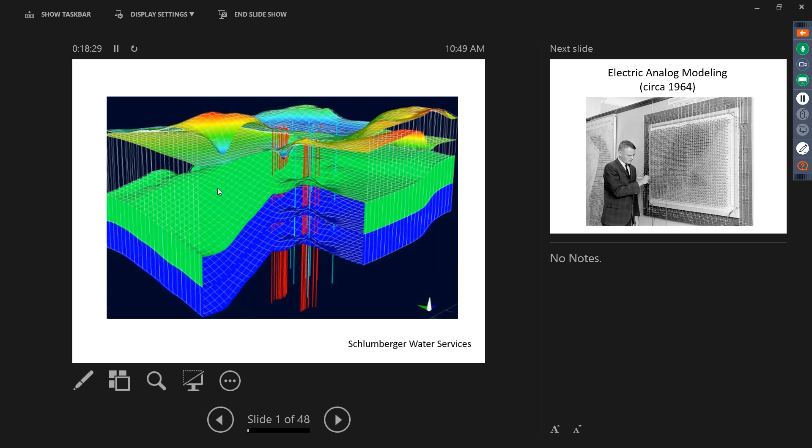So behind us, this is a picture from 1964, and we can play with this later, but this is how the Water Survey started to do modeling—the analog models. So, Darcy's law is very similar to...

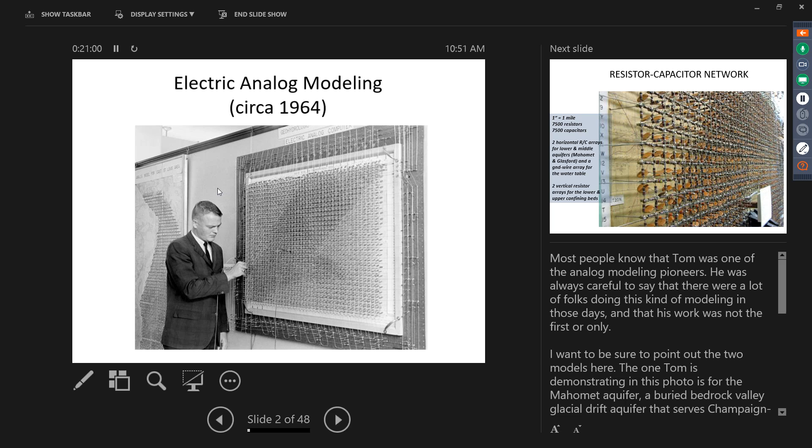If you go to the Illinois room in the other building, you'll see the one for the Mahomet aquifer in Champaign. So this is Farmer City on the topo sheet here, so Champaign is in here.

There's actually a whole series of nested ones. This is actually 2 layers - not 2 layers right here, but in some areas it becomes 2 layers. You can see it gets darker right here. There's another row of resistors below that.

And there's also capacitors. What do capacitors do? They store electricity, so this is how they did storage. This was a transient model. So for a transient model, you need to account for storage, and go from there.

So actually down in the war room, there's a paper sitting out - I think it's sitting out - on how these work, if you're interested.

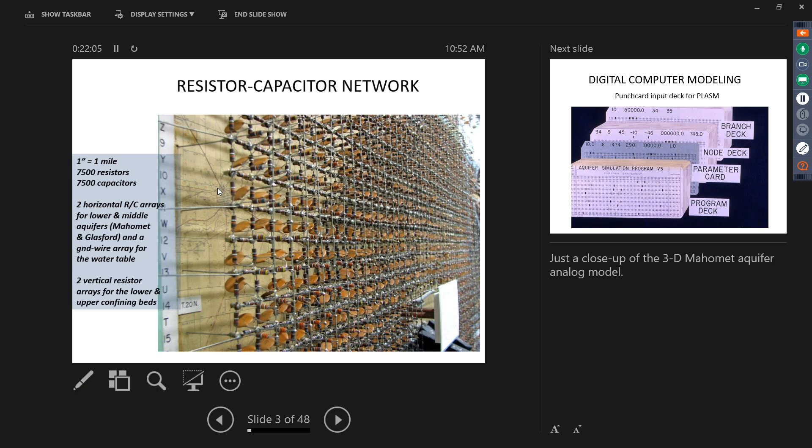We then went to the punch cards. I am not old enough to have ever used punch cards, but just barely missed it. Darn, no.

Bulletin 55 is written by Tom Prickett. He was here for a while, a very famous modeler. And then he kind of stayed around and tutored us a lot after he formed his own consulting firm, because he was doing so much work on the side when he was here. Did that for 20 years and then retired and just did expert witnessing.

But then in his later years - unfortunately he died young - he would come back and would like to come in and shoot the shit and pick apart my models and what I was doing wrong. And most of it actually revolved around storage.

It used punch cards, and there's a small anecdote. Supposedly, according to water survey lore - you know how true that is - no, to our computer guys who were around at the time, this was the first off-site job, at least non-military job, of a computer program.

So Tom was taking these stacks of cards - because each card has a line of code on it - down from the water survey, which is now CAB at the corner of 6th and Springfield, down to DCL, and feeding it through the card reader and running the program. And I thought, oh well, that is not very convenient, to take things down on a dolly, because it was a big thing. It'd take all night to run, but it runs like that now.

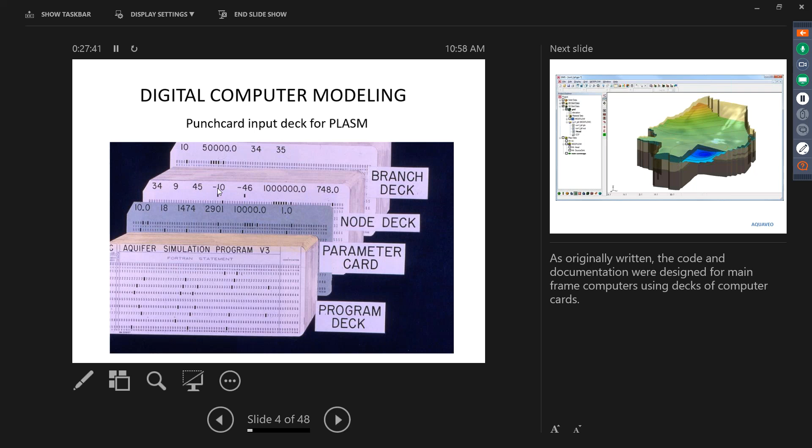Typical USGS. You know how long USGS review takes, right, Dan? Forever, yeah. So we'll talk about that in a minute.

These are just some of the newer packages now. Instead of punch cards, they have what we call pre and post processors or GUI interfaces, to make all the pretty pictures or get the data in. So we use Groundwater Vistas. We used to use Visual MODFLOW, but I think we have to keep our eyes open and change as things change or as they get better or not better.

So we're kind of wedded to Groundwater Vistas right now, but I think that's something we need to be very wary of, because it's a one-man operation, and if he gets run over by a bus, then we're stuck. Or he retires. Or retires, yeah, he's older than I am.

And his brother is, I don't know, some hermit in the mountains of Pennsylvania that actually does the coding. Really? I didn't know that. Yeah, Doug. You never see Doug. It's always Jim. The mythical Doug, yeah.

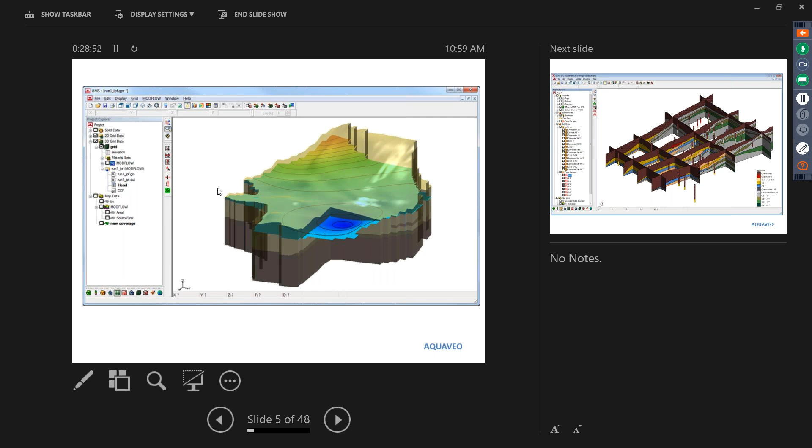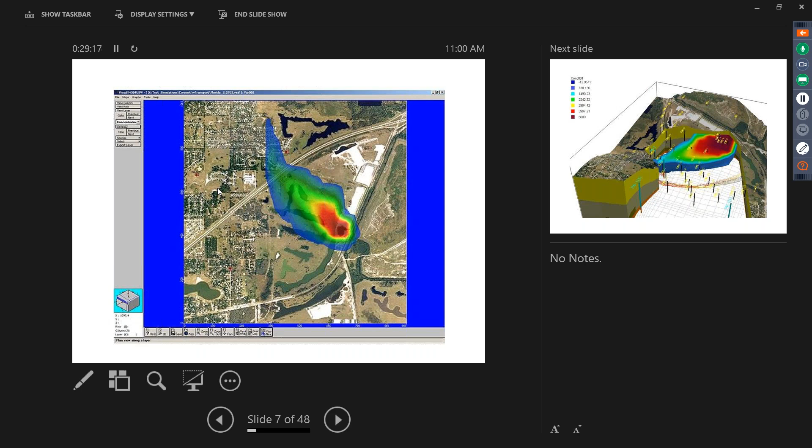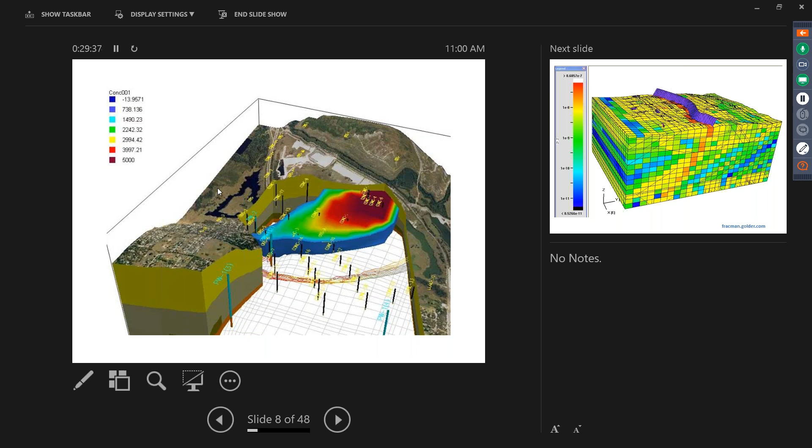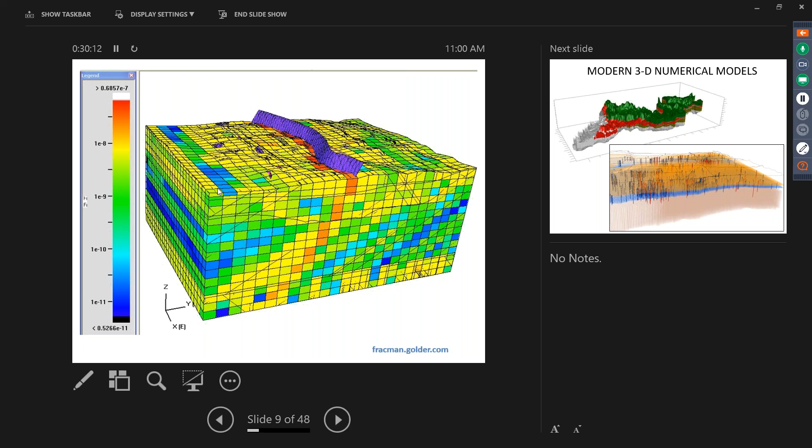And so there's many different ways to modeling. This is another way, and we'll talk about gridding, different approaches. When we talk about gridding, we'll get to this, but this is kind of a different way where you'd break everything up into even blocks versus layers following the geology. So this is a fault zone model.

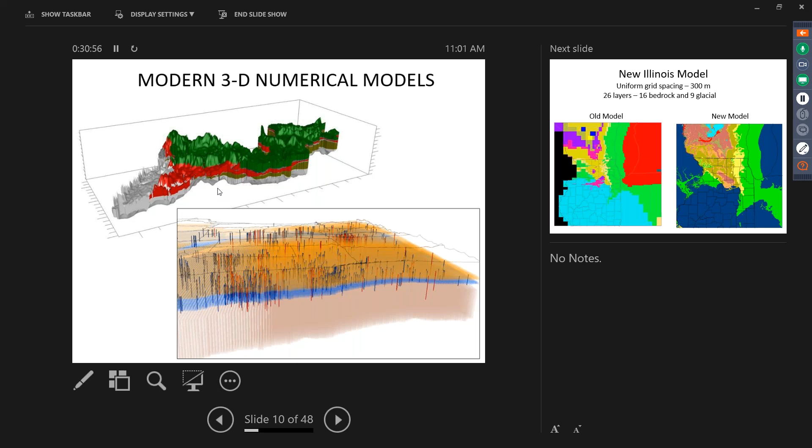So here's some of our models now. The one on the top here is a Mahomet model. So we have layers represented with thicknesses and elevations, and can display that all graphically, with different colors for the different stuff and so on. Some of Devin's magic from Kendall. Chicago is here with all of the multi-aquifer wells in the lower ones. So I think we'll leave this discussion to when Daniel's here.

Oh, Daniel decided to show up. Oh, perfect timing. I was just explaining why we model and then some of the past models, PLASM and stuff.

And up here is our old model versus the new Illinois groundwater flow model. Maybe I take off the word new. Nah, I'll leave it in there. Yeah, leave it in there. It's always new. It's always evolving. So computing power is greatly increased, but it's not just that. It's our tolerance for long run times.

And getting the data in and having the data to put into the model, of course, is a big thing. So each of you are working on different things as far as the pumpage data or the river data, or a specific region, Green River Lowlands. Dan's working on the transmissivity and that sort of thing. So all those pieces come together, and we're doing that all at a much better resolution scale-wise.

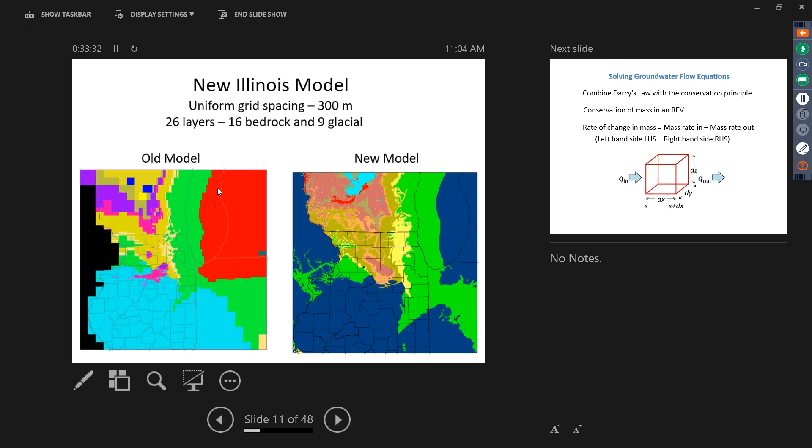And these models didn't talk to each other. They weren't based on the same grid, or they weren't based on the same underlying data even. And so that's the direction we're going, and we can save that more technical discussion as we go along.

So what's the beauty of a groundwater flow model? It basically is a mass balance. It solves Darcy's law with mass balance, or law of conservation, is the way I say it. So you're combining Darcy's law and mass balance. Just like with that analog model, you're putting voltage across that thing, and that voltage has to go somewhere. So it's sort of a perfect model because there's no math errors in it, unless you're generating heat or have a short, then you have a mass balance error.

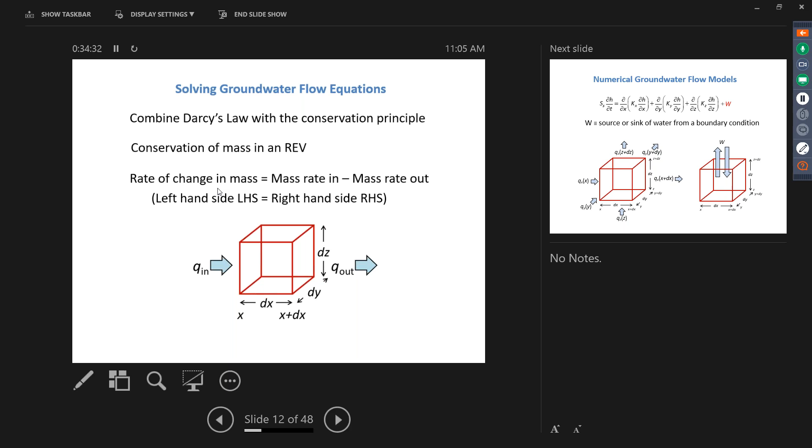A model is dividing the aquifer up into cells, and it's keeping track of how much water is flowing in and flowing out. So you've probably all seen the groundwater flow equation. This is the standard form with the K value that's allowed to vary in both direction and space, so anisotropic and heterogeneous, and then it's simplified from there.

In modeling, we usually have our KX and our KY the same, unless we're trying to do fracture flows or something. Our KZs we change quite a bit, and our KZs are really more important on the confining layers. So we have aquifers and then confining layers, and if they're sand and till, there's 7 orders of magnitude, or even sandstone and clays or shales. So what really is important is the KX of the aquifers and the KZs of the confining layers. You'll find that the other parameters are largely insensitive. Those are the driving parameters.

Do you normally assume that... oh, I'm sorry, I didn't want to interrupt. No, go ahead. Do you normally assume that KX equals KY? Yes. Okay. We don't have a lot of evidence to say otherwise. If we were modeling a fracture network, that might be one case where you have dominant fractures going one way. If you're on a very small scale, where you're in one river valley and you know the sand was all deposited one direction, yeah, you might, but our glacial geology is too messy to really have any confidence in that.

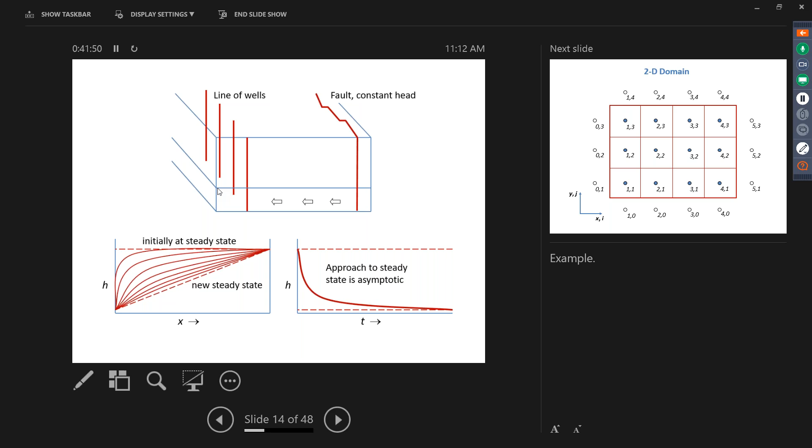Sure. And I got my whole Visual MODFLOW fired up so I could show in real time what the solver is. An actual good solver depiction. Yeah. So that's just a preview of a lecture on solvers, because there's a lot that goes into that.

So this is, let's say, a 2D model domain. It has rows and columns. MODFLOW starts with rows at the top and works down. Most software starts at the bottom and goes up, and so there's all sorts of confusion there. But generally, columns increase left to right, so that's good. So oftentimes you see things that are inverted, and you're kind of scratching your head.

Not that that's happened to Daniel anytime. Just about every time I try to code it. Yeah. Fortunately, Python counts backwards pretty well.

Yeah. So again, we're looking at this flow equation that we're trying to solve. When we're trying to solve this, it's going to be looking at the head in the cell and the values of the cells all around, because if something is going on in this cell, it's going to affect these other cells, right? So to solve this equation, we're basically solving Darcy's law over each of the faces of a model cell. And then in 3 dimensions, of course, we have the top and bottom as well.

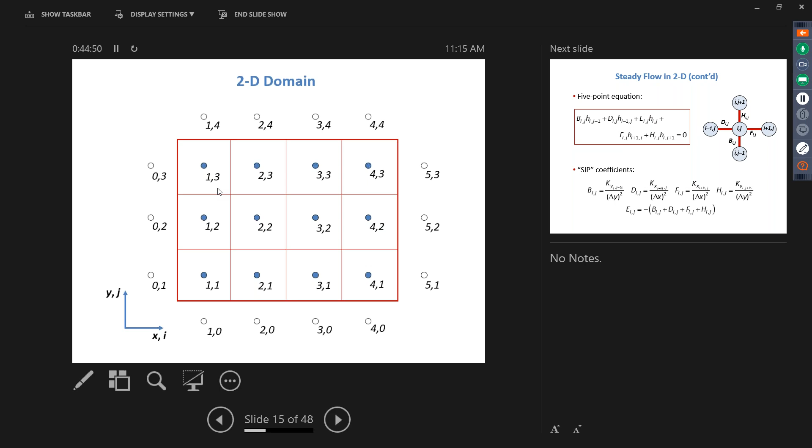Yeah, so again, here's this 5-point operator. You use the head you have in a cell at your current iteration or your previous iteration, and then the heads all around you. And basically, through all the numerics, you come up with these coefficients, and some things drop out and simplify, and then you have this 5-point operator that you're using to solve for flow. So SIP there is the solver, correct?

Yes, strongly implicit procedure. There's a lot of solvers, but that's one of the simple ones. Yeah. So again, to get more complicated in solvers, it just comes as a giant matrix equation that you're solving for. All the ones that aren't here are zeros.

So when your computer's sitting there churning away and it's just thinking and thinking, and you're getting errors and other things, this is what it's solving. So for each cell in your model, it's going to go through and do this. So the more cells you have, the more time this takes, because the bigger this matrix gets. And then, yeah, we'll talk more about solvers.

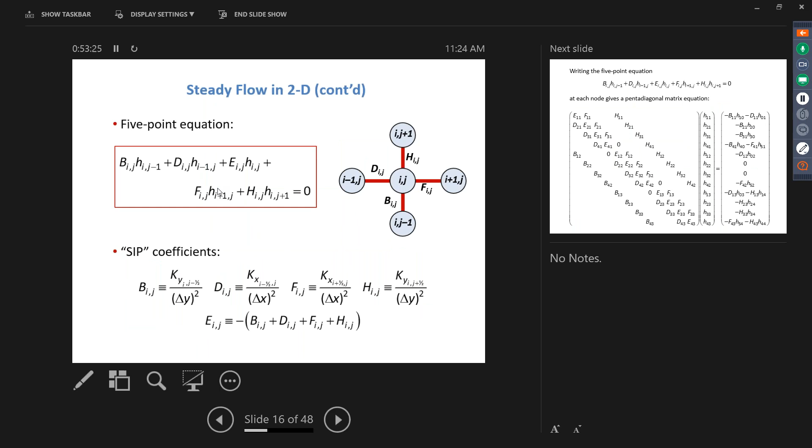But what MODFLOW allows you to do and improve over time with different newer versions of MODFLOW is the W term and how you get boundary conditions in and out of a model. Well, those don't really change, but there's different ways of solving this matrix and going about it. But I should mention that you get this big matrix, and I keep saying parallelizable, but it's hard to make this parallel. Or no one has successfully made it parallel. SAMG solver maybe. Nothing that we've gotten any advantage from. So it's still this long linear problem.

So Blue Waters would do us no good because supercomputers work by breaking a problem down and parallelizing it, or paralyzing it, and solving the problem really quickly. But a faster machine helps, and having more cores helps some of the in and out processing that has to go on, but basically it doesn't make the program run any faster in a meaningful way.

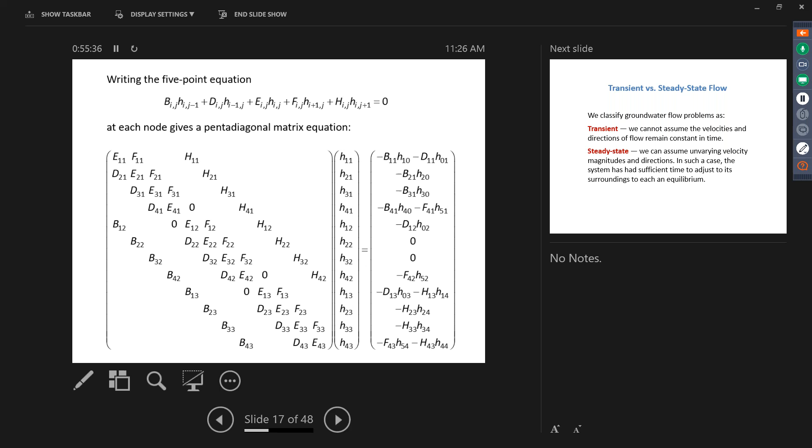Yeah, we found one of the biggest advantages of going up to a Modus was being able to navigate the larger models with the GUI rather than the actual runtime of the model. The MODFLOW side didn't benefit as much as the graphical user interface that shows you MODFLOW. Yeah. It's the speed of the chip. That's everything. So if it's the same chip in this laptop versus Modus, it's going to run just as fast. Well, it's got to write a lot of files, and that's sped up by Modus. But yeah, so I just wanted to make that point.

And there are other attempts we need to consider. The Dutch have decided, well, okay, maybe I can geographically divide the grid up into sectors and solve each of those sectors and marry them back.

Maybe works. Unless you could just attribute it to the Dutch. The Dutch, yeah. The crazy Dutch. Yeah. Well, we won't get off about Dutch.

So those are all things we need to consider going forward. Is there an advantage to some of those other solvers? So, MODFLOW, getting back to it, is the industry standard. Everyone's using it. It's what's under the hood of every GUI, so Visual MODFLOW or Groundwater Vistas or GMS or any of these fancy programs out there, all run MODFLOW and all write almost the same exact files that are back here in the report, there's lots of examples in here, but it generates these text files that are read into that MODFLOW Fortran code.

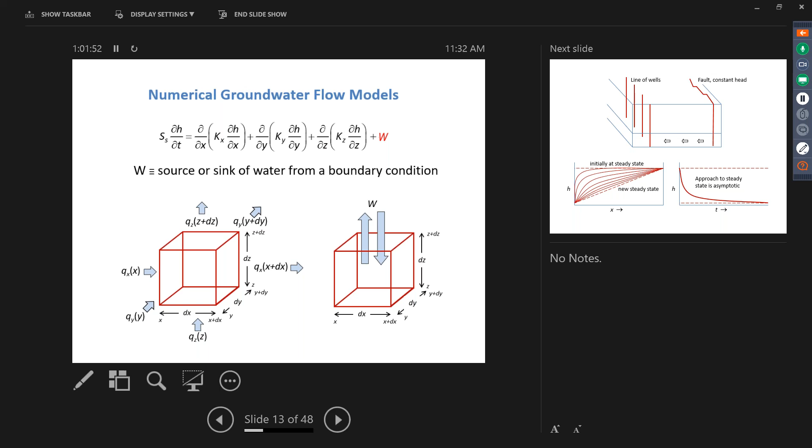...and you had two calculations here, the recharge comes into this cell, and then it's got to work its way through this cell to get out. So you get a very different answer with two layers versus one layer in how this recharge is treated. You have to think about that—this W term is putting the recharge over the whole block of the cell, not just on the top. I've seen many models go awry in that direction.

Okay, we're going to spend a lot of time on rivers. Rivers are a different kind of boundary condition where you set a head in a river cell, whatever elevation the river is, and you set a conductance for how the stream bed behaves—whether it's clogged or very permeable. It then takes water in or out of the model depending on the head in the surrounding cell, so it's called a head-dependent flux. If the head is changing in surrounding cells, the river takes more or less water. Whereas a constant head is held constant, a river cell's head can change—it can have a river condition, but the head in the cell can differ. It can be a well-connected aquifer, or not, but we'll get into that.

Then there's other things—drains that can only take water out; I'd expect a drain to only take water out, and it's based on an elevation. And there's evapotranspiration, so we can say we have so much recharge going in, and as the water table falls, a lot of that is evaporating out.

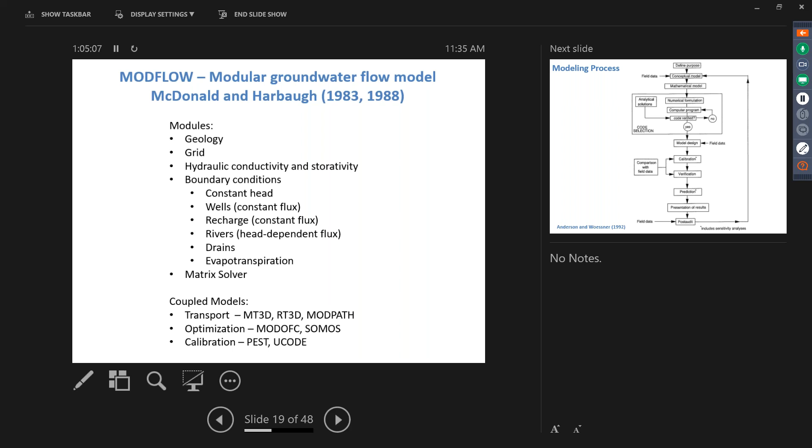Different matrix solvers, we'll talk about that. And then different things we can add to the model, like contaminant transport, MT3D, RT3D, optimization codes, calibration codes, all sorts of post-processing codes that take your MODFLOW model and do something else with it.

I think this is out of Mary Anderson's textbook. Mary Anderson and Bill Woessner wrote a textbook on groundwater modeling. I'll put my copy in the war room if you want to read it. This is kind of the modeling process, and you've probably all been through this in some form of the scientific process, and it's pretty similar here.

What's the purpose of your model? That's the most important question. What am I trying to do? Can I bastardize this old model to fit this new purpose? It's a common question.

This is where we run into our biggest problem, the conceptual model. What is going on? We can't see groundwater, we can't see the geology, we can't see if the wells are in multiple aquifers unless we look through the data and all that kind of stuff.

You have to be flexible to change your conceptual model. You have to admit that you were wrong. It's like, oh, this isn't what's going on, or my preconceived notion or whatever first thought was way off, and start reevaluating the conceptual models.

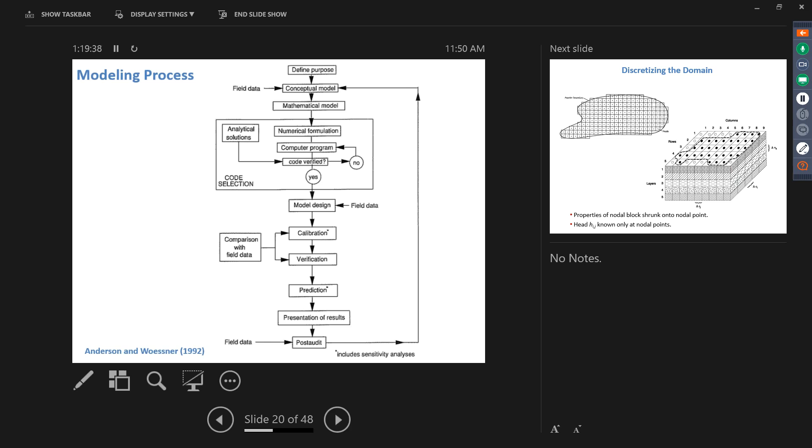So discretizing the model, that's creating your grid, deciding where your grid nodes are, what your grid spacing is going to be, both horizontal and vertical. So do you go out, like in the Green River lowlands, do you just model the lowlands itself, or are we going to extend the model out, up the Paw Paw Valley and maybe up the Rock a little bit to get that complexity, or do some thinking about what's going on up there. We have to go to the discharge locations. We have to bring that model all the way down the Illinois River, get that discharge wherever to the west. So, it's deciding where to go with your boundary conditions.

So we think the Rock River is kind of the north end of the flow system in the Green River lowlands, but there's sand north of the Rock River. So are you going to model all the way up to the end of the sand or just to the Rock River? As soon as you cut it off at the Rock River, something's going to go in on the north side of the river, and they're going to ask you, well, what happened? So my advice would be to go all the way to the edge of the sand.

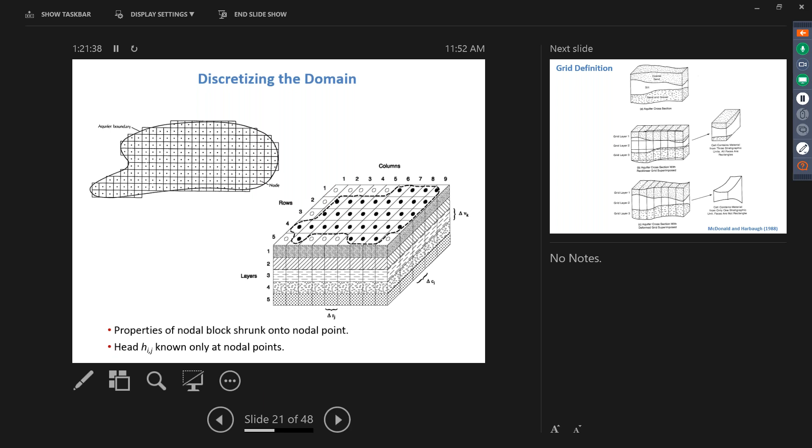Yeah, as much as we want to pretend Iowa doesn't exist. I know, it exists. It exists, like it or not. Not in this room, it doesn't.

And of course, how you define it vertically. In days gone by, we used to use much more even layers. We didn't have a way of displaying variable grids. They still don't do it well now. I guess Vistas does it fine. Visual MODFLOW, the bottom of the aquifer is uneven. It used to be when you plotted it up, it would make the bottom even and distort everything from there. So they put in a dummy layer with a flat bottom just to get it to display right in the GUI. That's why you guys did that.

Yeah. Okay, I never understood that. Why there's a no flow layer at the very bottom. Oh. It's all fairly graphical. Okay. So yeah, I'll point that out in the ModFlow model. Yeah, because the early versions of this didn't do that right either. Gotcha. This makes the whole graphics a lot easier because then, instead of just having this nebulous white bottom, you can actually color it and say, okay, that's the bedrock.

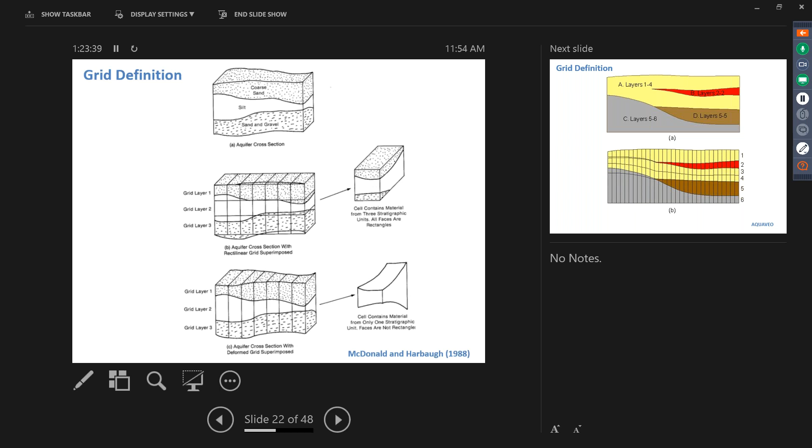And so these sands are pinching in and out. So the way you might do it with an even grid is, the sand is twice as thick here as over there, but you change the transmissivity, basically changing the K through here to reflect changes in thickness. That gets really complicated. As we've gone on, we've definitely gone to something more like this, where the layers change with thickness.

So old ModFlow, original ModFlow, good, reliable, verified ModFlow, requires a layered approach. If this is our geology and we have the sand or this clay layer, say the yellow is the sand, and it pinches out. It doesn't exist over here, so we just have one aquifer, say our Tampico and our Sankoty. In regular ModFlow, that layer needs to exist through the whole model. So you've got to decide how many layers you have or how many you really need.

And even if a layer only exists in one area, it needs to go throughout the whole model because it's a grid, and that operator is looking for the next grid cell over in that layer to solve the head equation with. And if it doesn't find anything, then it just crashes. So ModFlow requires grids over the whole area. And I was saying the bottom layer being variable, like in the Mahomet model, this is all the no flow layer just to make the graphics good.

But newer programs, unstructured grid we'll talk about, don't require this. The layer can just end right here, and then there's some funky math that goes on here to make one cell match up to two cells. And so it uses these ghost nodes and stuff, and it might be worthwhile for you to explain that just so you understand it. Yeah, I'm not convinced I actually understand the math behind it, I'm happy to do that. Okay. Not now, but I will look through the math of it. But that's where GUIs help in terms of setting up, because there's a lot of setup that has to happen to make this work right.

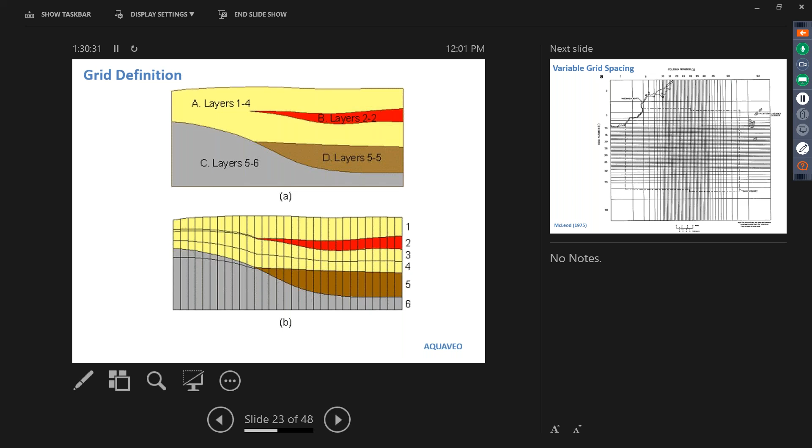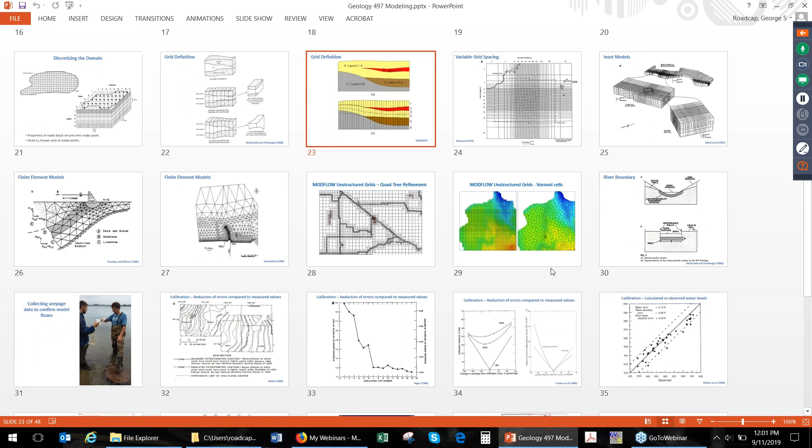The most challenging part of the year-long process of developing the new Illinois model that George talked about was the pre-processing of all these layers where they pinch out, making sure that the geology is reflected properly. It was actually rather disappointing after spending all that time when I was able to just pinch them all out at the end. That was effort that I didn't even need to go through at the end of the day. So this is kind of a new frontier of modeling that we're going down. If you look at our past models, they won't have anything about this in there at all. So it's allowing us, hopefully, to go forward much better than we did in the past.

But it also creates some challenges when you start looking at flow budgets, and some wonkiness with flow budgets through pinched out cells. So when we get back to vetting the code, it limits us some in what we do with flow budget, at least right now. You have to be very creative on it, and you get some pretty bad flow budgets if you're not careful. And if you get a bad flow budget, then you've got to worry about, is this model telling us anything, or is it just garbage? No.

Nope. You know, the nice thing about a simple model, just using the basics, is there's none of that voodoo going on you have to worry about. Mm-hmm. I say voodoo, that's just because I don't understand it. There's math behind it. Yeah. You know, but is this math really correct? Or I mean, it might be correct in theory, but is it really applicable?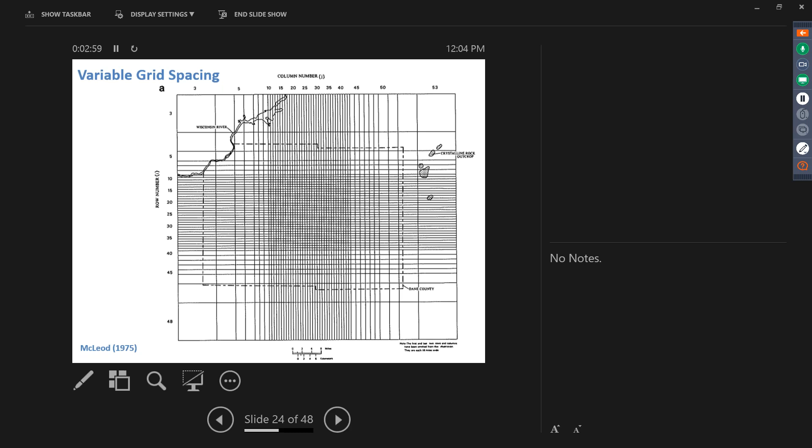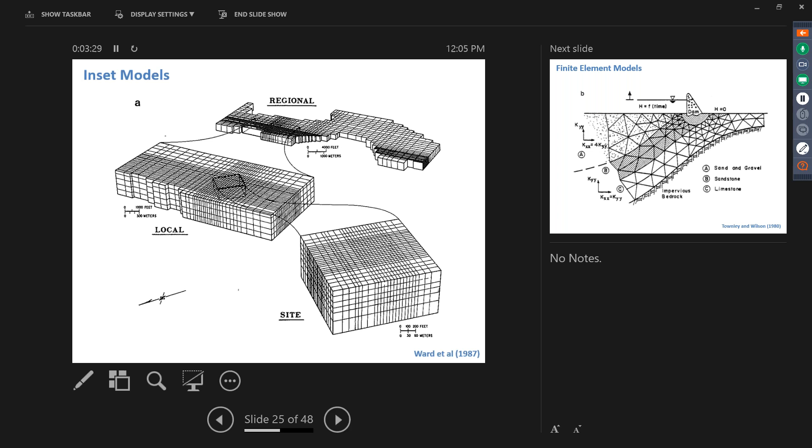But as we move in the Illinois groundwater flow model, we have areas here, here, and here. So basically the whole state's our area of interest now. But that doesn't mean we can't take the Illinois groundwater flow model and telescope it back down. This is an example of telescoping where you have a big regional model and maybe a more local county scale model, and then you can zoom in even further. So this might be our Kane County model, but we wanted to model a quarry in Crystal Lake, Illinois, so we zoomed it down to a specific location.

So these are finite difference models, and then there's finite element models. A finite difference model you can think of as squares or rectangles or cubes. You don't have to be constrained by that quadrilateral geometry. You can use triangles or other odd shapes. So this is one using triangular elements. Each cell is matched with another cell face, so you can directly calculate from one cell to the next.

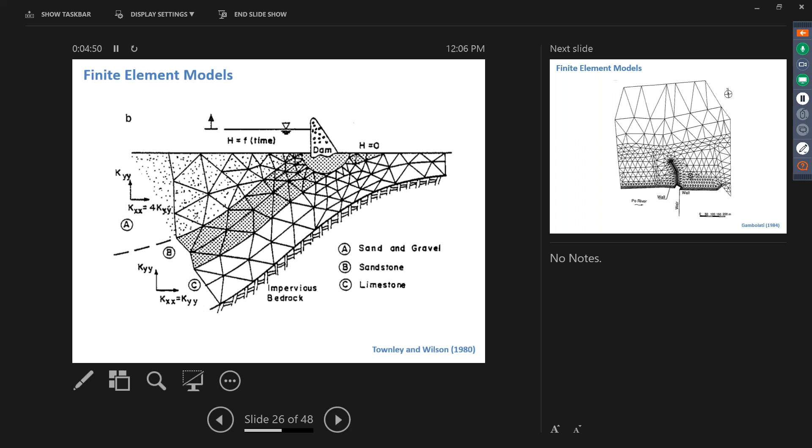And you see these where you have big changes in scale. In this case, it's a dam. The dams always fail right here, right underneath. So you need a lot of detail right underneath, but you can't ignore the whole flow system. And the geometry is such that if you just had horizontal layers, you get really odd pinching of flow and very poor representation of the flow around this structure. So you can't use a regular rectangular grid.

Here's another one. We have an Italian river flowing east, and there's some kind of weir here, and a wall, and some kind of control structure. So it's most likely to fail right at the edge, or right underneath. So they got a lot of detail there, but they also need the regional flow towards that.

This is something where we're just touching on unstructured grids. This is called quadtree refinement, where you see one cell going into four, and then that cell going into four more, and so on. This allows for a finer resolution of your river system, and then away from the rivers, where things aren't changing as much, you may not need as much detail.

So Daniel Feinstein in Wisconsin, did he use quadtree for layer one, and then standard grids? I think he actually just went with a uniform, really fine mesh in layer one. Oh, okay. But I think he's used quadtree in another model. So is this something we need to consider for our rivers? Just throwing it out there.

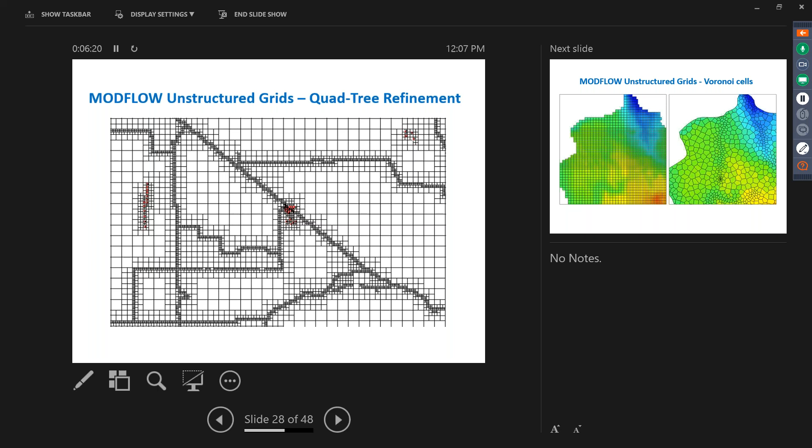Then there's something called Voronoi cells. I don't even know how to explain Voronoi cells, but the math gets a lot more complicated. Ghost nodes are going crazy in this one. So you have all these different shapes, any kind of shape you want, as long as you have the math behind it to back it all up. So here, for example, you have 4 nodes going into one.

You know, I don't know how much this is catching on at all, but Jim allows you to do this in Groundwater Vistas 7. Yeah, I haven't really seen anybody using it. I haven't either. But I see a lot of quadtree though.

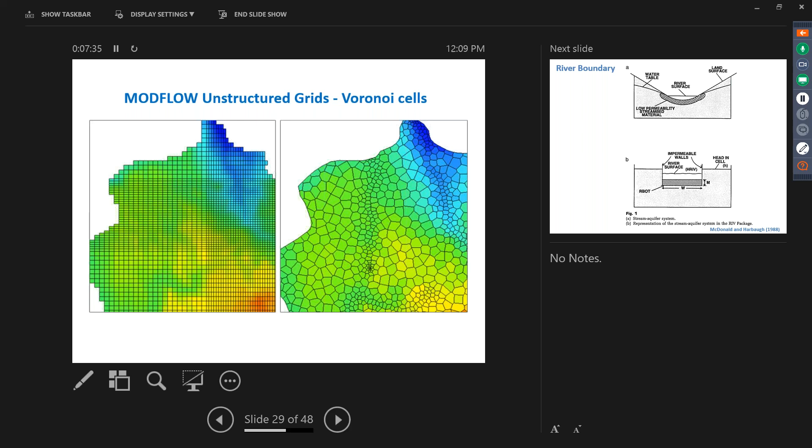I think it's being used in other branches of engineering for some modeling. I know some of the structure people use this kind of stuff for like I-beams and things like that. It's just hard for MODFLOW modelers to get away from the grid. Yeah, my son uses a lot of finite element modeling for failure of railroad ties and railroad rails, because the stresses are not evenly put on the tie.

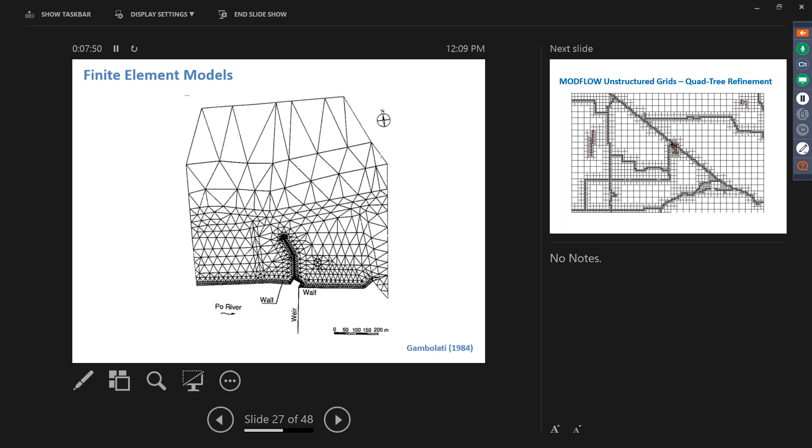So I kind of went over some of the basics a little bit, but I think this will get much more discussion oriented. A lot of what I want to accomplish here is tell you where we've come from, but also where we need to go. I could just leave and pretend that all my models are super and don't have any flaws. Well, we also don't want to look at it and be like, what was he doing there? Why is there an inactive layer 8 under everything?

And I think also what you touched on in terms of speeding up models. I've always viewed that as a very strict sort of procedure that you follow. You look for this, then you do this. That's something that, in theory, we can code to a point, and then evaluate how that's working and go back in and do some manual changes. There are ways we can let that run in the background and help improve our models while we're doing other things.

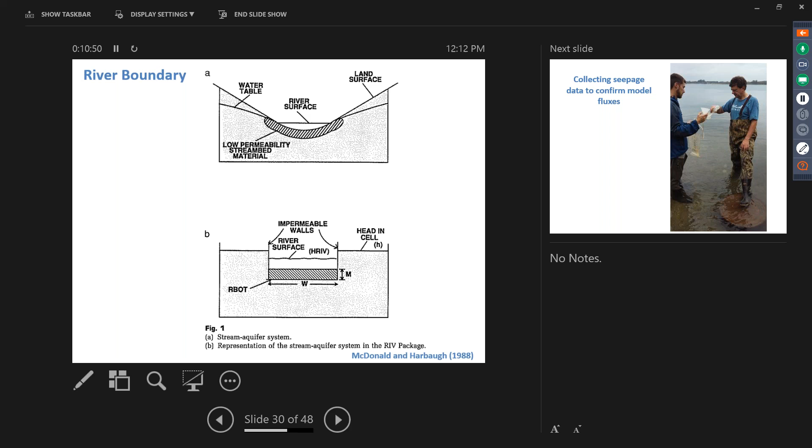So George, I think I told you October 14th through 24th, we're trying to get Kevin to approve funding for a transport webinar series from Jim, where he'll run through basic transport concepts. We'll expand on those here. He only has 2 hours to do it. And then on top of that, talk about MT3D, and some of the new beta, let's just call them unvetted, transport packages that we may want to use. But again, we have to make sure that we trust them.

So that's something we want to get an early start on. That'll be October 14th to 24th if we get funding for it. I don't think that's going to be an issue one way or the other. But I will fill you in on all the details and give you the information if you'd like to join in there as well.